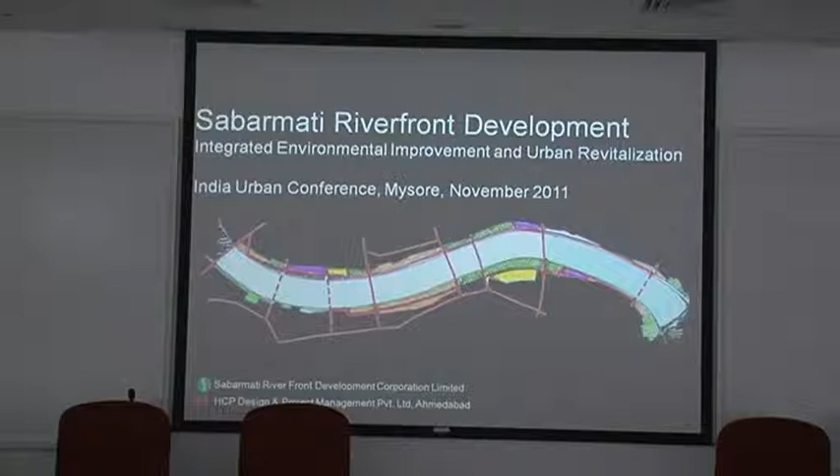Okay, I hope you can hear me. What I'm going to talk about is the Sabarmati Riverfront Development Project. So I think you've already seen this presentation. So I haven't actually. You haven't? Okay, well, then I'm very, very glad that you're going to be here.

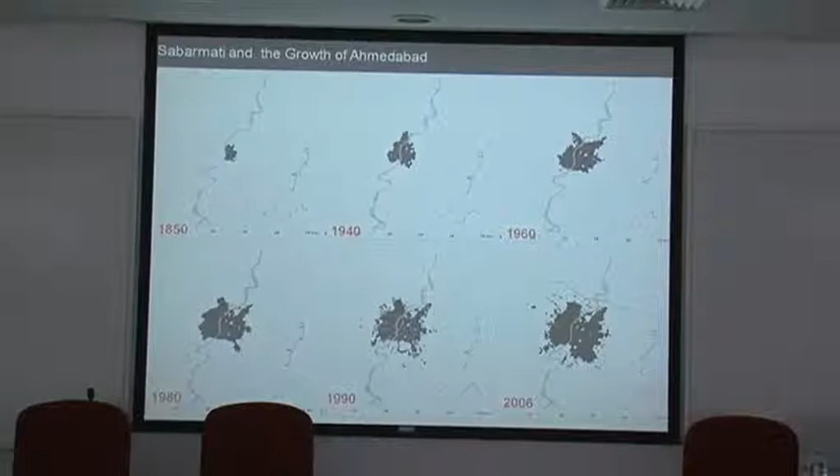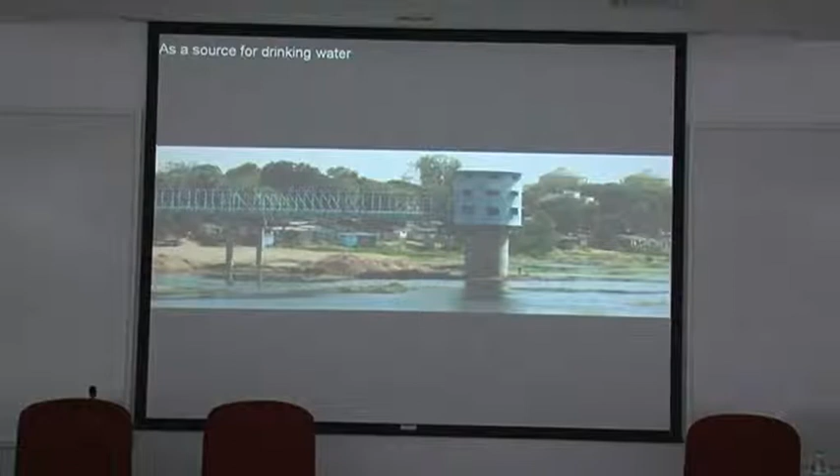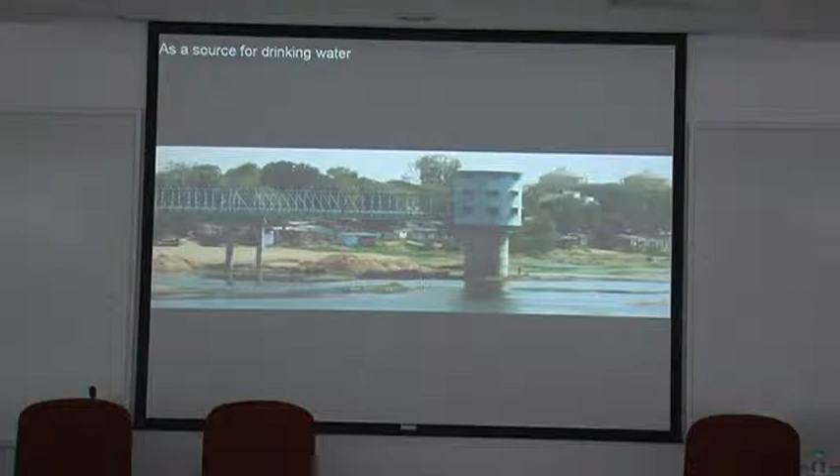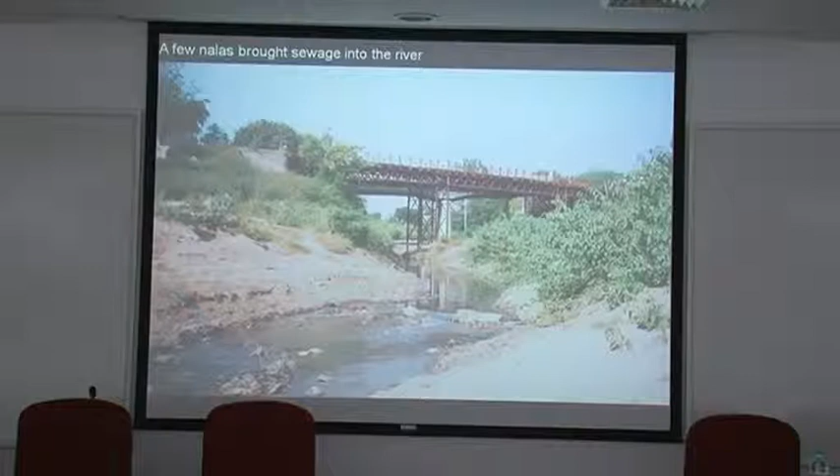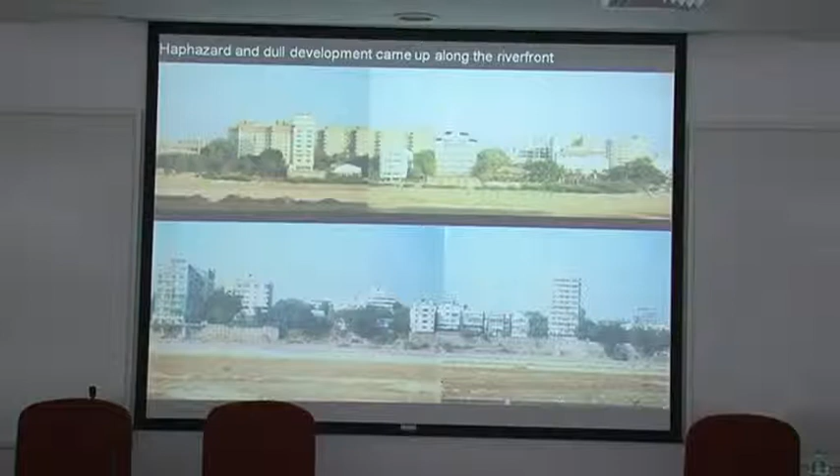Most importantly, if you look at the entire river, and this is when there's water during the monsoon, the entire edge of this river is private. There's not a single... if anybody wants to walk along the edge of the river, you would have to cross private properties. It's like a beach you have built right all the way up, and they're private properties.

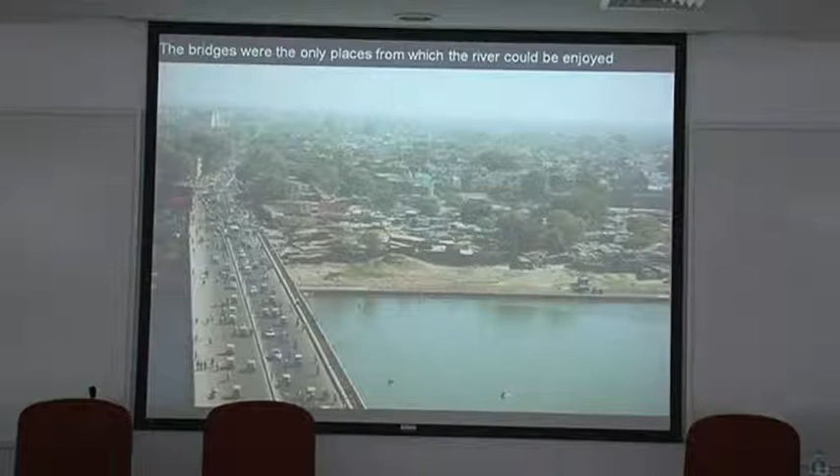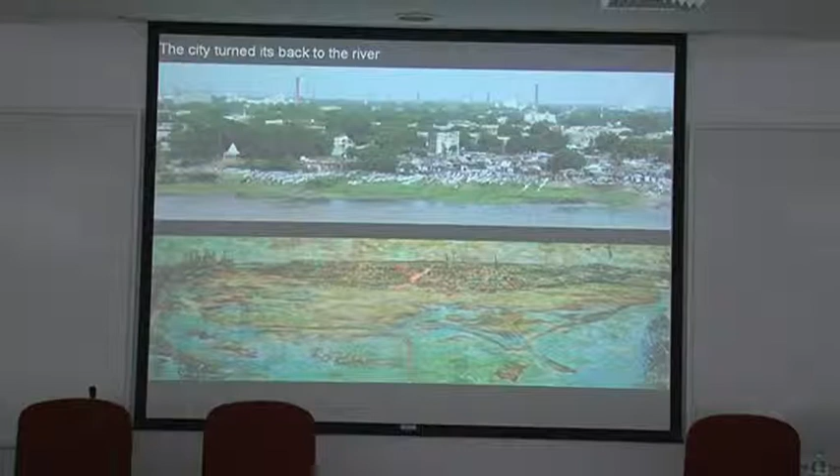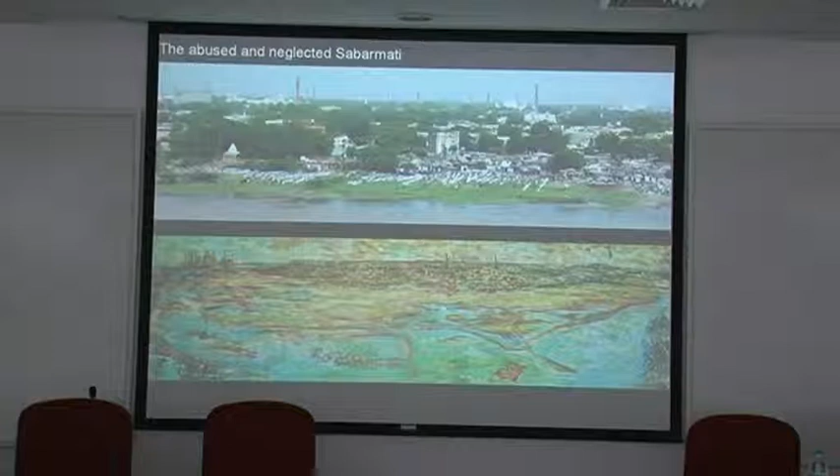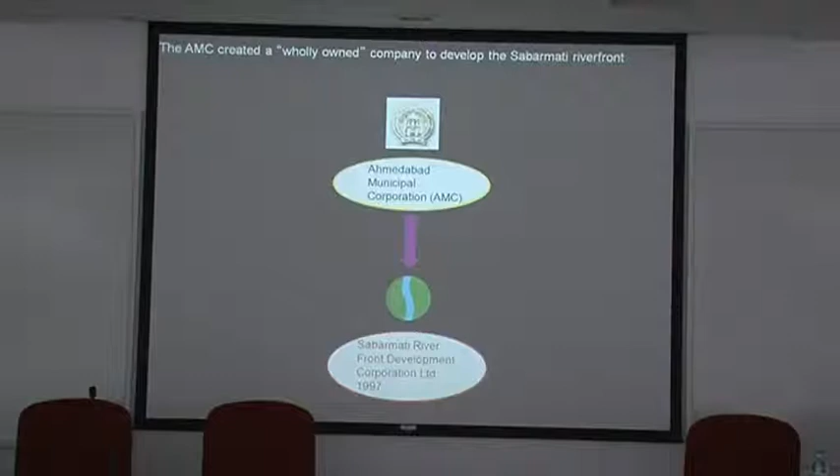The Ahmedabad Municipal Corporation became serious about doing something about the river in 1997 and set up a wholly owned company, a municipal corporation owned company registered under the Companies Act, to develop and make the riverfront. So it's a 100% public project I'm talking about. There's no private development in it.

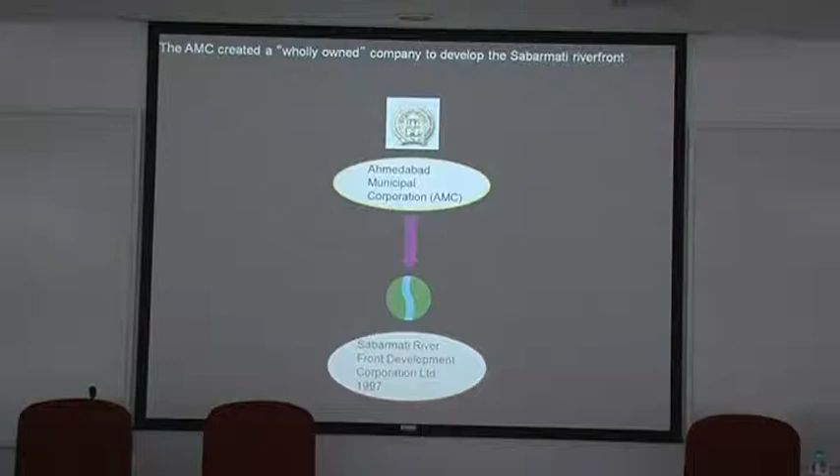At that time, in 1998, the first schematic proposal was drawn up after looking at all aspects of the project. So everything from physical features of the river to river hydraulics, land use, slums, implementation strategy, cost, project cost, etc. Everything was worked out at that time.

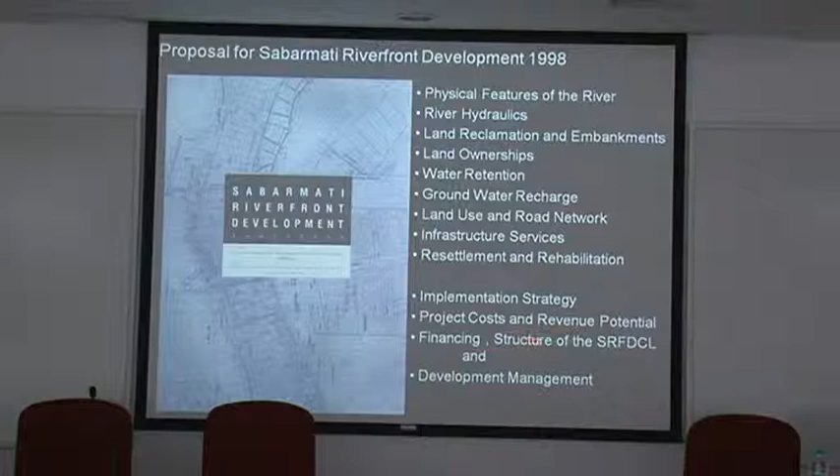The project that was devised at that time is a multi-dimensional environmental improvement, social upliftment, and urban rejuvenation project. It's not just one thing. It has many dimensions and many ambitions.

But before I explain them, let me first explain the context of the project. It's important to understand it.

Which means all the rainfall that falls in this area gushes past Ahmedabad. In the monsoon, you would get a lot of rainfall and a lot of floods. The city and all the towns along it would get affected.

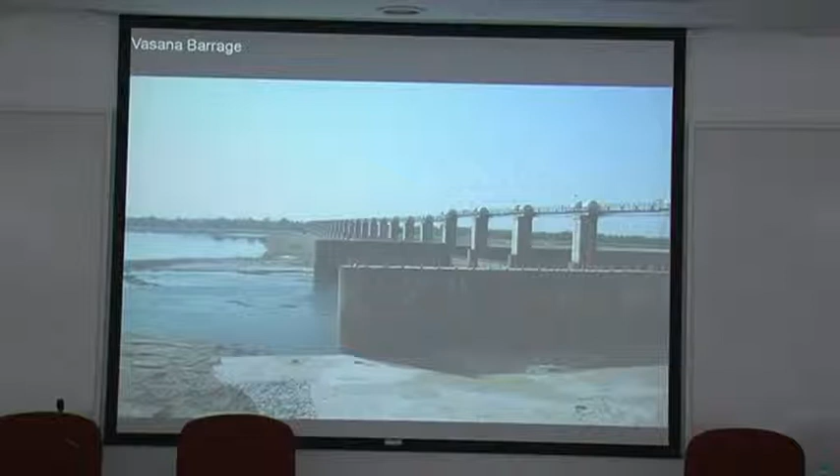So after the water was used up, the river was empty again. Here you can see that barrage, and this is the water that's held back. It's a shallow dam, you can see. When the water gets used up for irrigation, there's nothing left, and the river becomes dry again. So through summer it's dry, and through monsoon it has a little bit of water.

What became possible? Here you can see a nearer picture. This is Ahmedabad here, you can see the river going down like that. That's the Vasana barrage, that's the water held back by the barrage. This is the canal for irrigation. And you can see just upstream of Ahmedabad this Narmada canal passing by. They gave a little inlet so that you could actually replenish the water in this barrage and use it for irrigation.

So what this did was make it possible for Ahmedabad to have water in this much area for the entire year. Ahmedabad ended up having the possibility of having a linear lake. It's basically a linear lake held back by the dam. And you had this linear lake, a 12-kilometer long lake, right through the middle of the city.

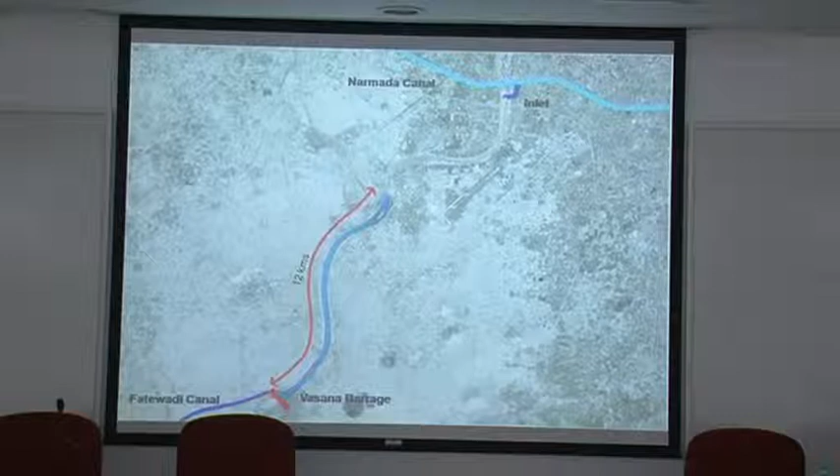Now this project, as I said, is ambitious. It has many different environmental, social upliftment, urban rejuvenation type of ambitions.

There's a whole series of them, let me go over them straight away. The first ambition of the project is to make the riverfront accessible to the public. This entire river edge is private, and the first ambition of the project is to socialize the edge of the bank of the river.

The simple way that was done was to build two parallel embankments that cut right across, and to reclaim the land, just in the same way that Marine Drive was built many years ago. And so you would get a sliver of land.

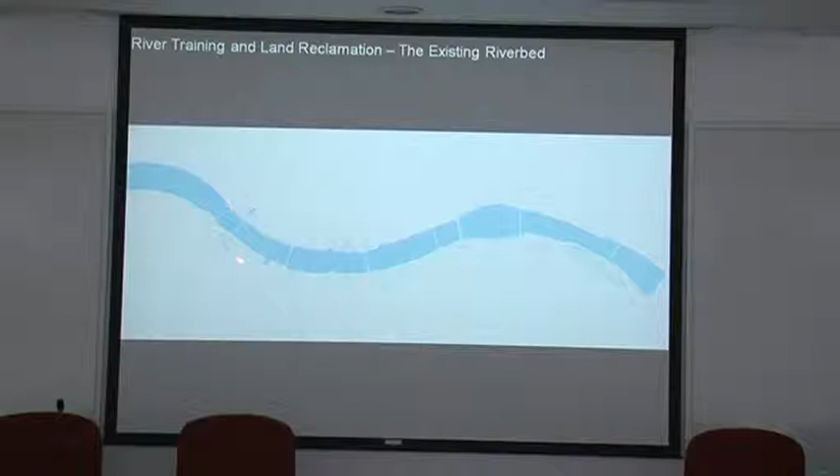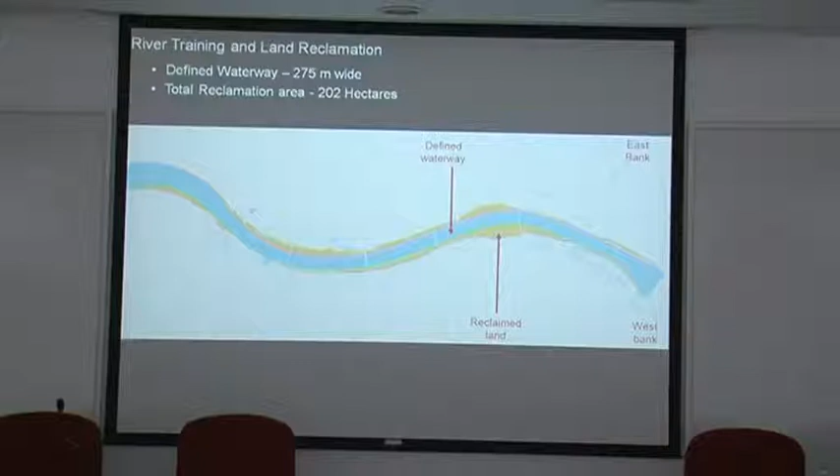Now, if you look at the section of the river where it's wide, it's quite wide, 679 meters, and the two embankments could be built 275 meters apart, and here you would get a lot of land. But where the river is narrow, you would get a very thin sliver of land.

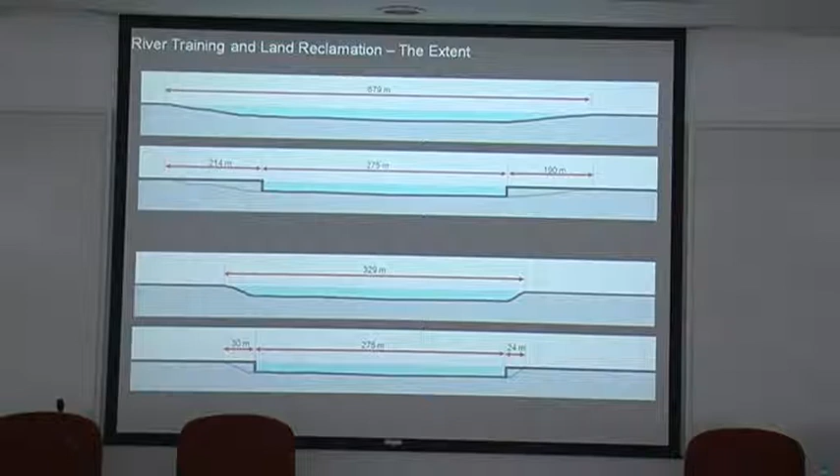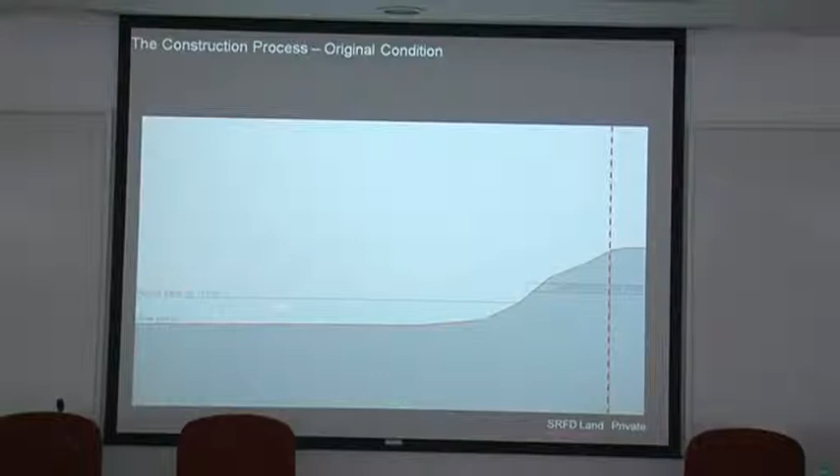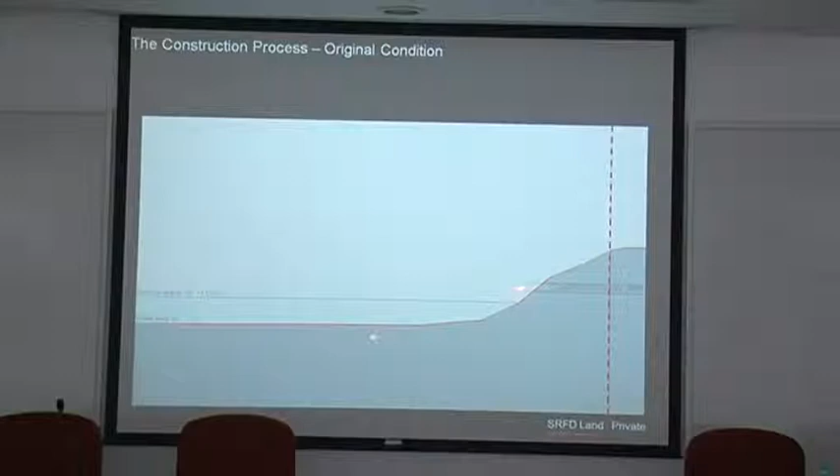Now, how was this done? This is the bank, one bank of the river you can see. This is the water that is held back by the barrage, the water level. When the flood comes, it comes to the top of this level, but this is what is held by the dam. And this is the stormwater drain that brings the sewage into the river. And this is the line that divides private property from public property.

So the first thing that was done was to take some soil from the river and build a construction platform like this with soil, and then put a concrete wall that goes into the bed of the river. You'll understand why this is done. And build a platform just about 2 or 3 feet on top of the water's edge here. And this is what is built here.

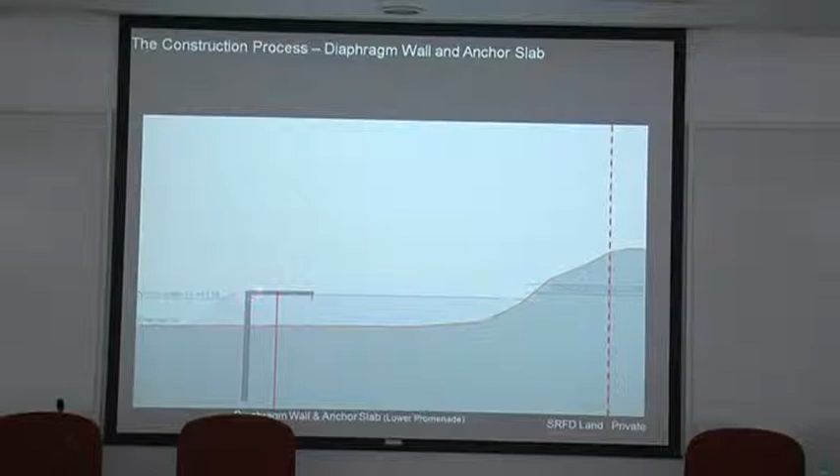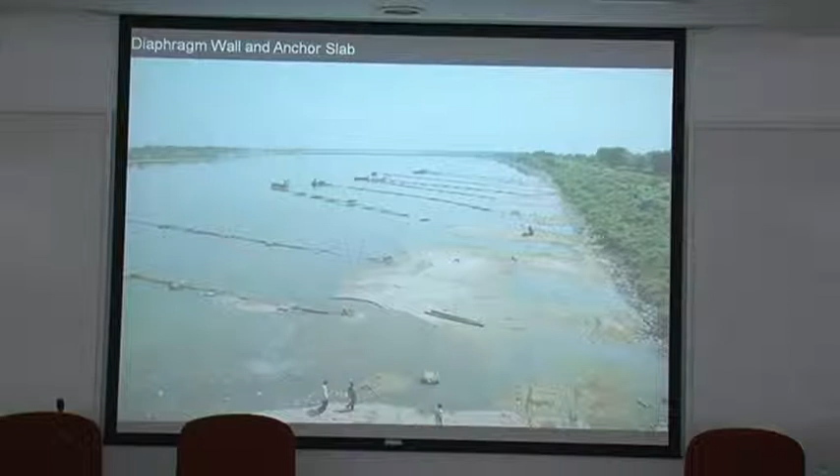It's not very difficult to do this, just a simple jugaad you have to do. You have boats here with pipes and pumps, and they bring water and sand here, and the water flows back, sand stays here. You've got your construction platform. And soon you have a platform like that, and then you have to dig a trench like that.

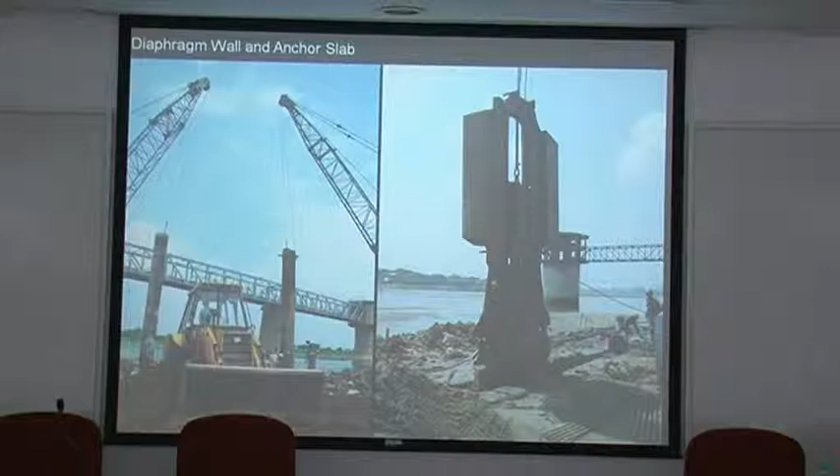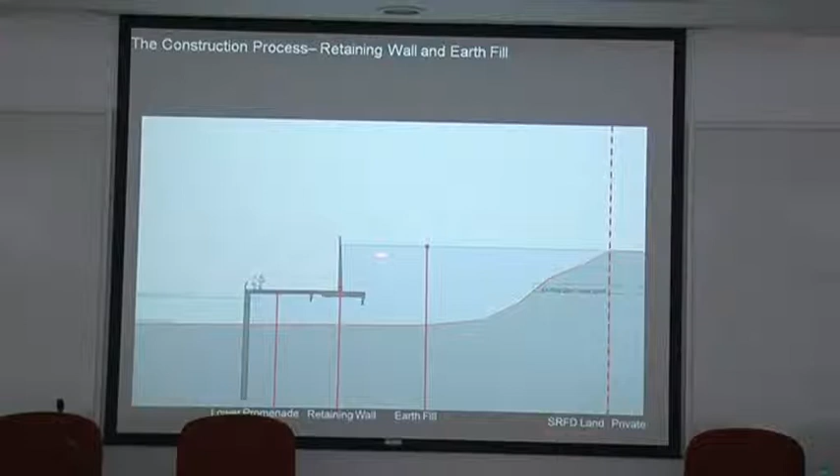Then the next job is to build this second wall here, it's a retaining wall, and then you fill earth here. So you bring this level right to the top of the existing bank here. And this is how the wall is built. You can see this is, once again, not very complicated work. This is easy.

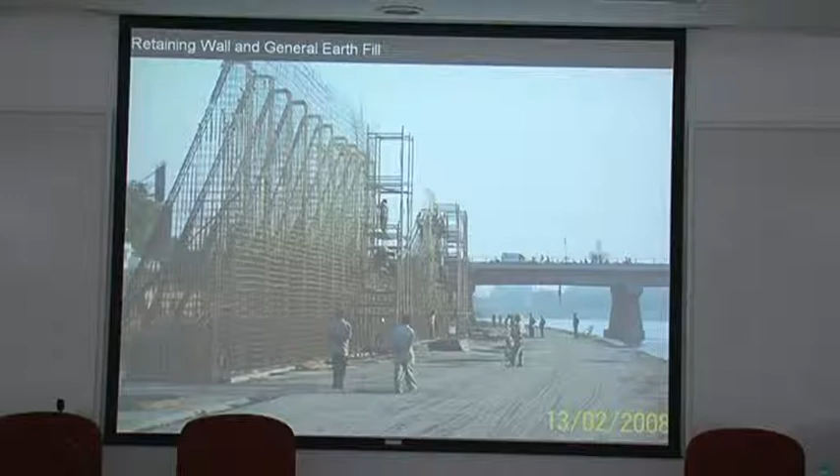Here's the wall being built, and these are steps coming down. And here's the earth fill being done at the back. There's a lot of earth fill that has to be done. You can get all of this earth from the river and put it here, because when the next monsoon comes and the flood comes, it'll bring more sand and soil down. So that's not a big problem.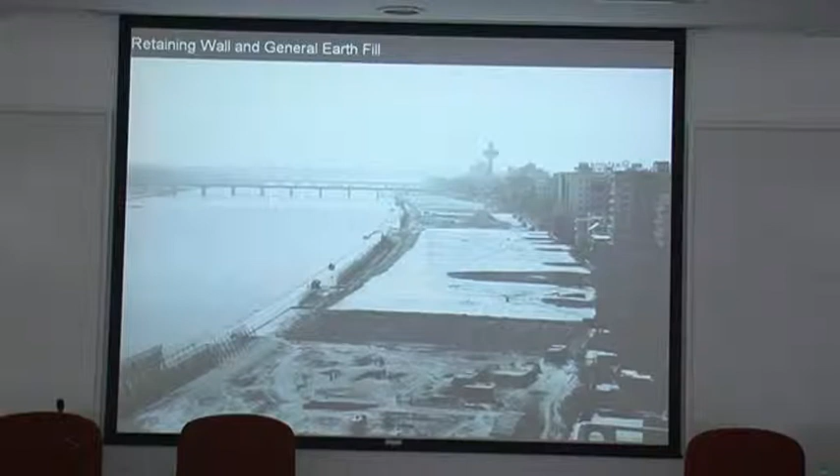Once that is done, here's some more pictures of it. And today, both of these sites have been completed, of course. So the entire length of the river is public. So that first ambition, so to say, of socializing or making the edge of the river public and accessible to the people has been achieved. Some of the earthwork and things are still pending, but pretty soon it will get done.

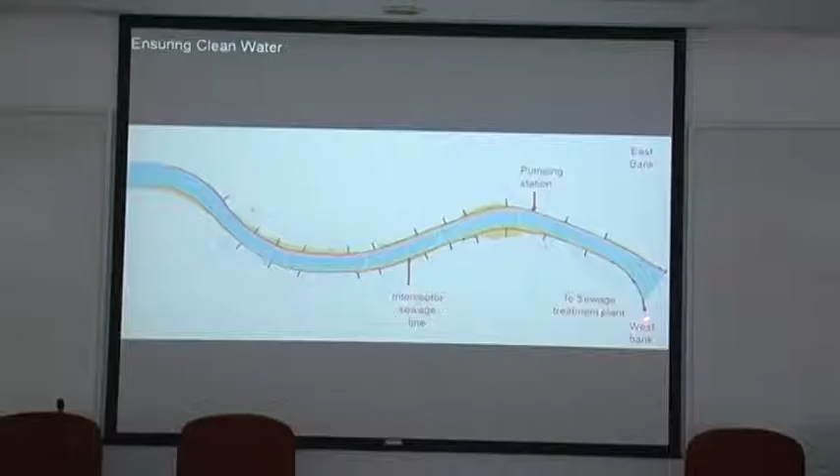The simple solution is, while this earth fill is being done, to put a big interceptor pipe that connects all the places from where sewage is coming into the river. You collect the sewage and take it to two treatment plants, conveniently located at the two ends on both banks, near the barrage. Their capacity is augmented, and then this pipe collects all the sewage and takes it right through.

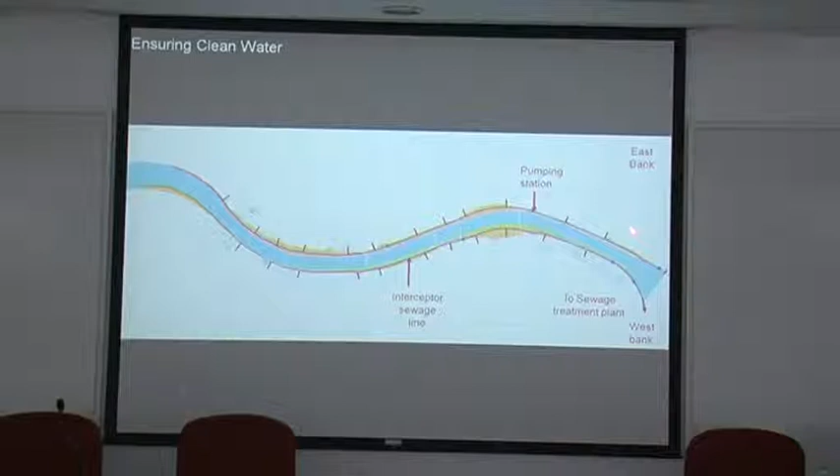So here's the pipe. You can see it runs through here. Just think of it for a minute - if this pipe was built without all of this other work, it would have to be very strong with very strong foundations. But the synergy from doing these things together means this pipe doesn't cost very much to build.

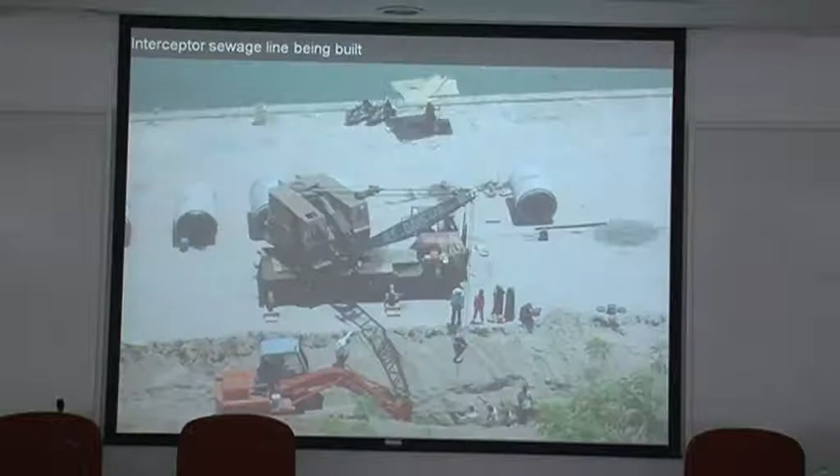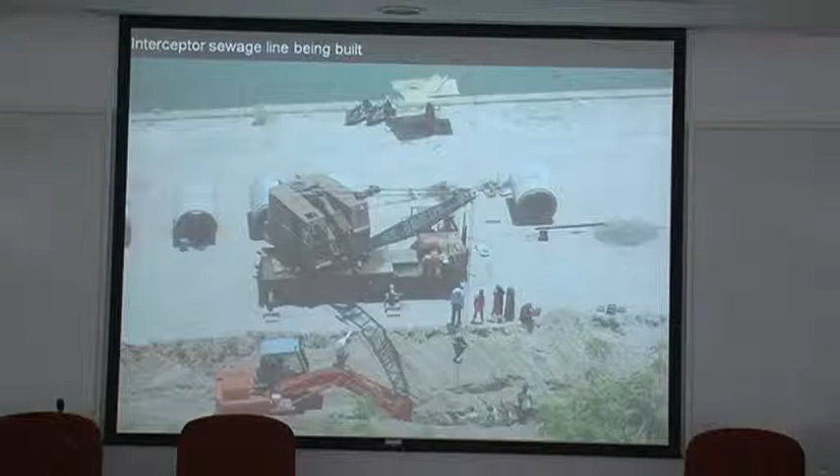You can see the existing stormwater drain being connected here, and the pipe being laid in the mud and soil. This is the pipe with the manholes, and these are the pumping stations.

I think in another month or so the pumping station work will be finished - this is an old slide. So we can say that within another month or so, the flow of sewage into the river is going to stop.

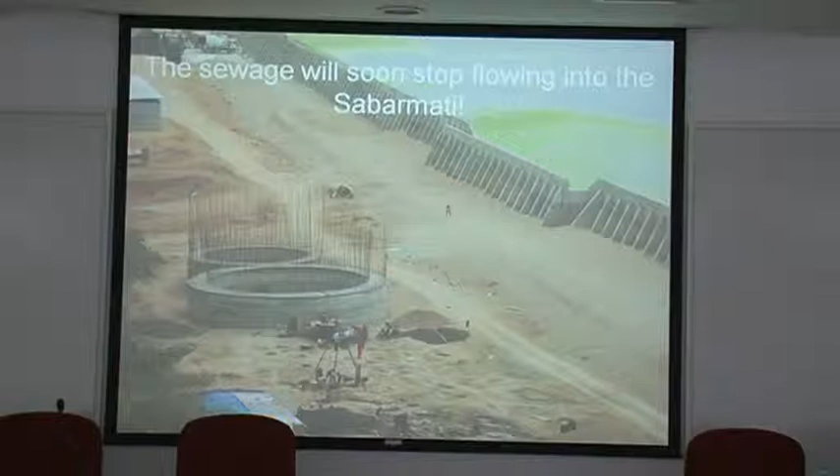The other ambition of the project is to provide housing for riverbed slum dwellers, because there's lots of people you're going to have to dislocate. So here you have the slums.

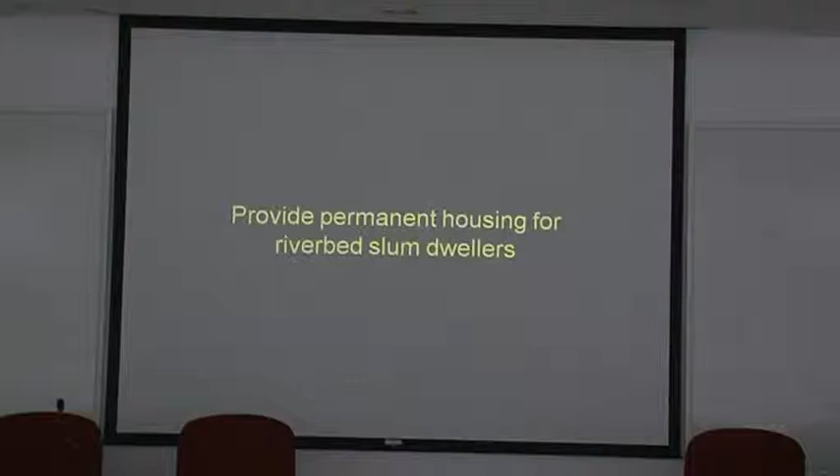Within the city, other municipal plots were found where housing could be built for the people in the slums. When the project started, these plots were not identified and not yet available. If you look at the old project report, we said one simple thing: we are reclaiming so much land, we will use 10% of it to build the housing.

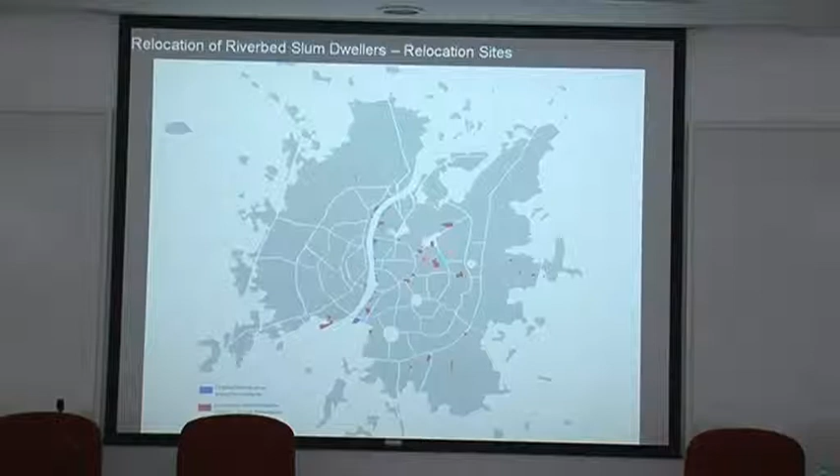But once the project got going, the municipal corporation said, why use riverfront land for housing? If it can be turned into parks and gardens, it's much better. So then all of this other land was found - these are all the relocation sites.

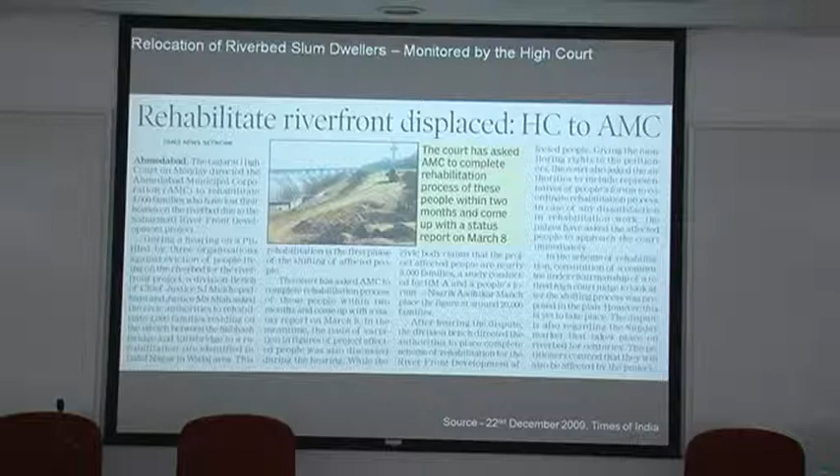The relocation is being monitored by the Gujarat High Court. The plan is submitted to the High Court, and the High Court monitors what is happening. Only when the houses are ready is the project allowed to move the people.

As of 17th December, you have 1,387 households done, with an average of 25 to 40 households being moved daily. At present, all the houses are ready, and people are going to move. Inevitably this process is a bit messy, but it's basically a voluntary process, and people are moving into housing of this sort. The project, of course, pays for the housing in one way or another.

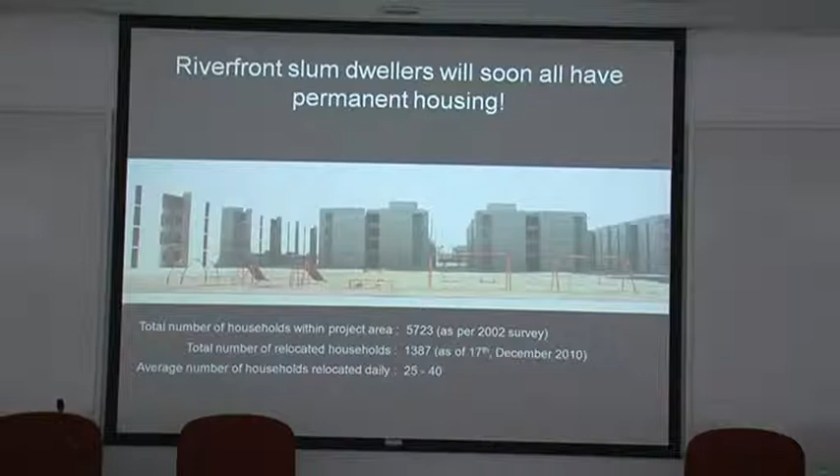Many people, including myself, don't like all of that concrete, but that concrete has a purpose in some sense.

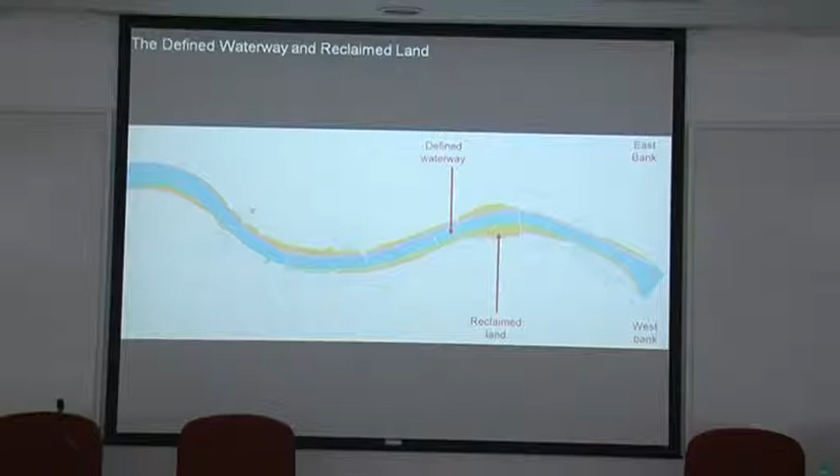Also remember, the principle of design was simple. Intuitively, it seems that if you narrow a river from this width to this width, the water level should rise—that's intuitive sense. But you can see what happens when you narrow a tube like that: the velocity of water increases. So far as the velocity increase is the same as the cross-section area decrease, the flood carrying capacity of the river remains constant. If your velocity increases by 5% and your cross section decreases by 5%, the flood carrying capacity stays exactly the same. I'm simplifying a bit, but not too much.

That's the principle on which we decided how much to narrow—we narrow just enough so that the flood carrying capacity remains exactly what it was in the natural condition. That's something to keep in mind.

This is not just some computer simulation. This is a release of water in the river during 2006 when a lot of measurements were taken and the calibration of the computer model was checked out, by independent agencies including IIT Roorkee, and we found that the model holds. So it's not some imaginary stuff we're talking about—even when you reduce the cross section, we find that it's exactly right.

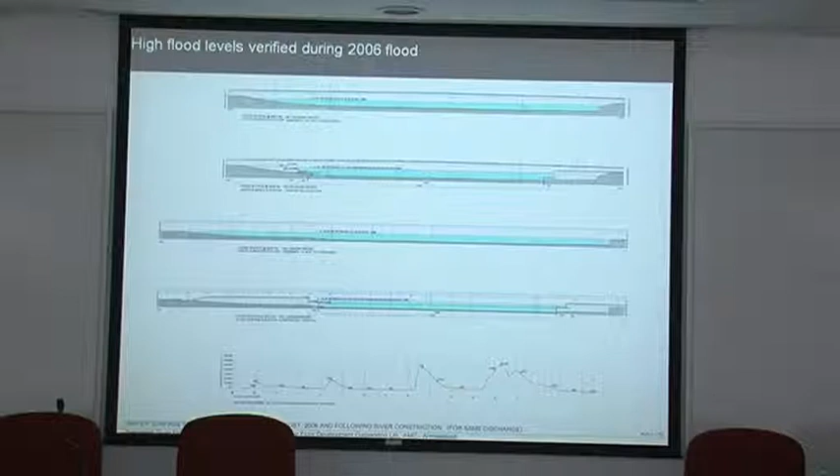And the risk of flooding is significantly reduced in low-lying neighborhoods on account of that. Now the idea is to use all this land to create many parks, promenades and gardens to enjoy the water—that's really the purpose. You want to create public space here.

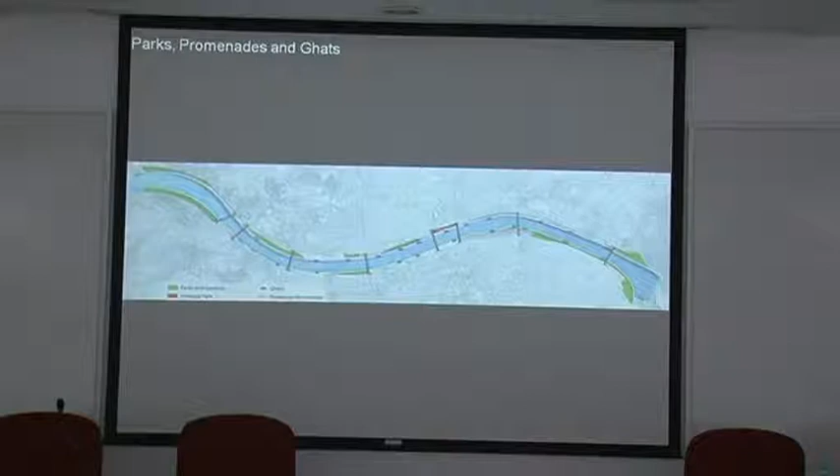So all this land can have beautiful parks and gardens if you want to. The idea is that all of these green spots are land reserved for gardens, and there's a promenade that runs along the length of the river, also at the lower level, near the water.

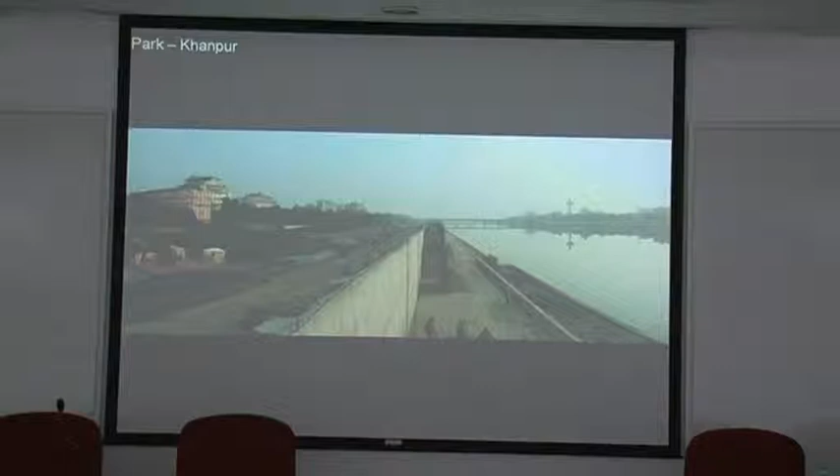Here you can see an actual photograph—you can see the revolving restaurant here. This is that lower promenade, which is entirely pedestrian. This presently is still not complete work here; you can see there's a slum here, and there's a Ganda Nala with sewage going through. But here's a visualization of what this same place would be like after it's done.

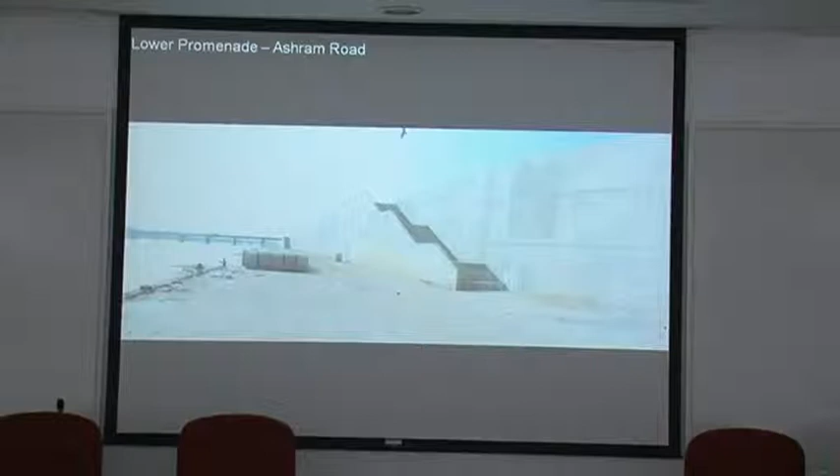Of course, this level can get submerged during floods, so there's no other activity here except pedestrian movement and walks. Here you can see where this walkway comes down. Someday these trees will have grown—they're already planted—and you'll have a marathon here in Ahmedabad. It's just an imagination for now.

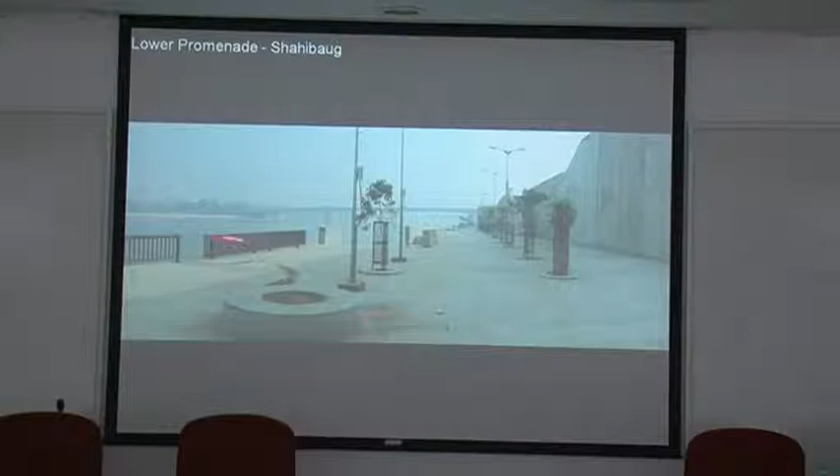Here you can see the place where a sample was prepared—this is the lower walkway and the trees here. You can imagine a Sunday morning sometime in the future. In fact, this place is going to be thrown open to the public on 27th December.

The lighting is being finished, and the trees have started growing—a little taller than in the earlier picture, but it'll get there. Eventually these are all neem trees we're growing, so they'll be big, and this becomes, at the water's edge, a place where you can walk and promenade.

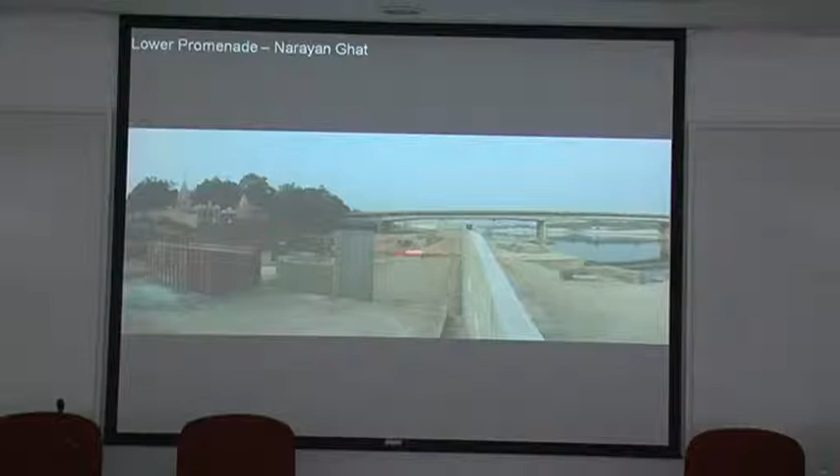Here's an existing temple, and here's a visualization of Ganesh Visarjan, the festival where people come with their Ganesh idols and take them down. This place has also started getting used now.

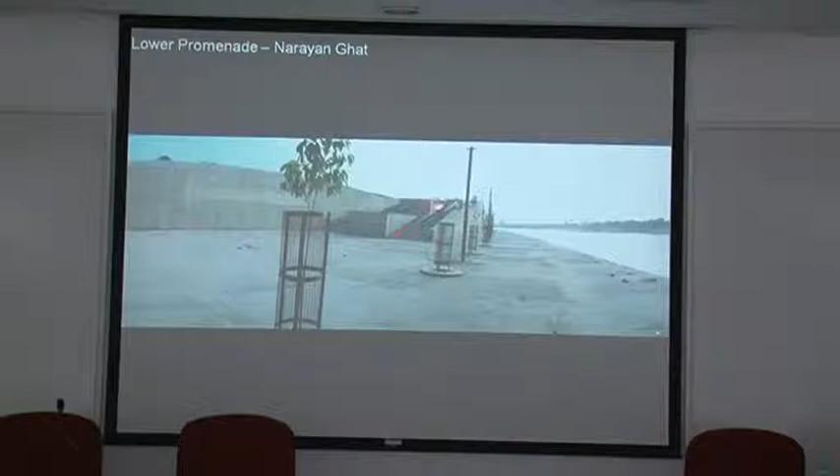Now, the project will add almost 1 million square meters of parks, promenades and plazas to Ahmedabad in the center of town. This will make it possible to go for a 10-kilometer cycle ride or a walk without any traffic around.

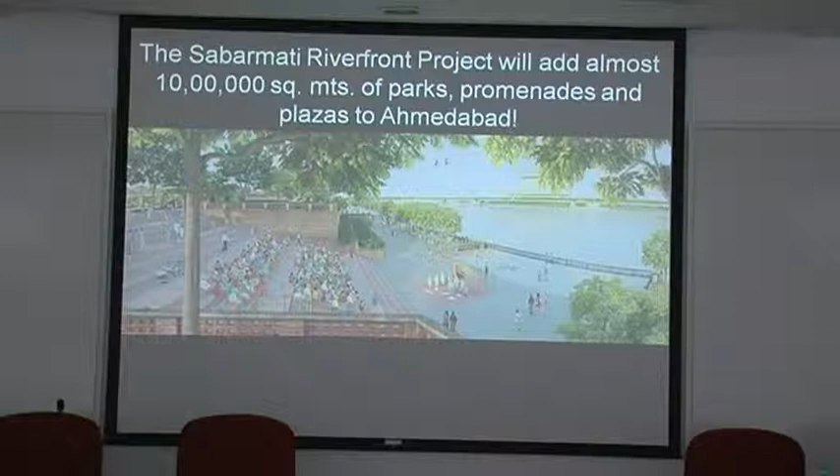People started using it already. You can see here the sample stretch I talked about. About 14 months ago, during last year's Ganesh Visarjan, people had come with their Ganesh idol and suddenly found this clean place, because it was a sample we had done and kept clean, and they broke out into a dance. Our cities are so starved of places where people can act.

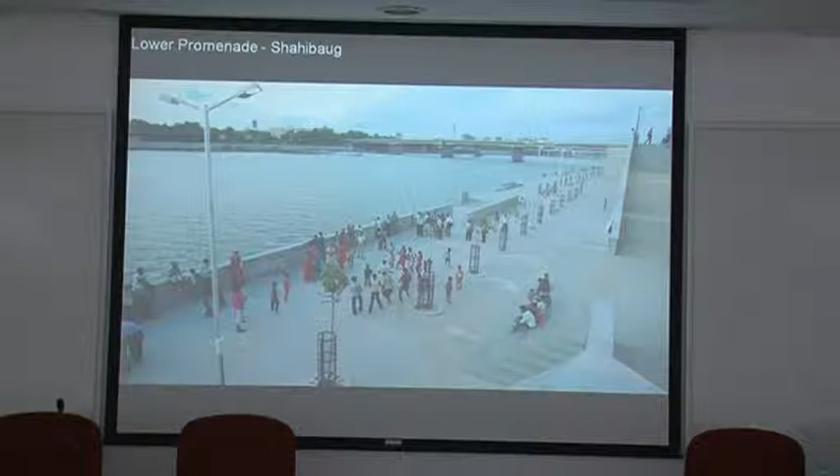Here you are—just impromptu, they took out their slippers and started dancing. We were thrilled, really.

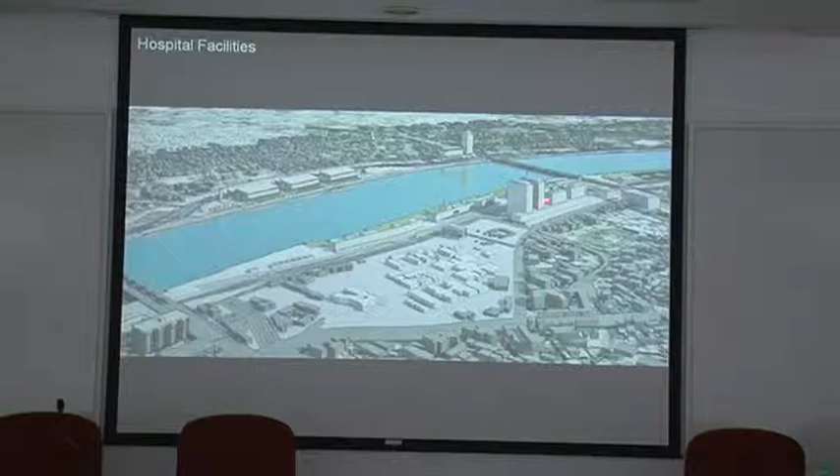Here, for example, is the existing hospital facility of the city—very low density development in the center of town. The idea is that this land from the riverfront can be used to build this hospital in a modern state, and this land can be freed up to do something else. That's a possibility.

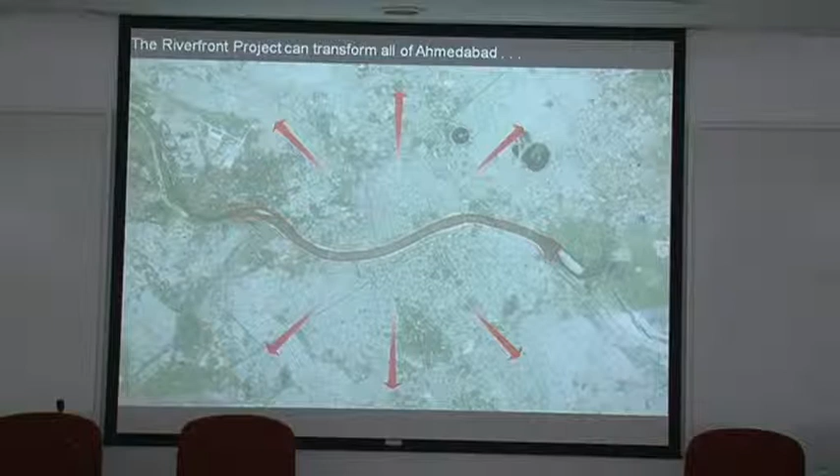Also the idea is to revitalize riverfront neighborhoods. Next, please. This project runs through the middle of the city. Next, please. And its idea is that this project can be used to transform the areas along the river. Next, please. And precincts have been identified, and precinct plans are being prepared for all the neighborhoods along, for essentially what is their character, what can they be in the future.

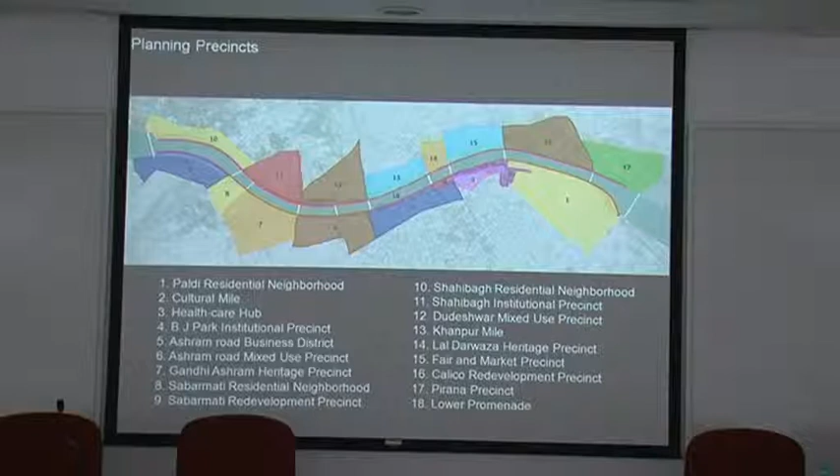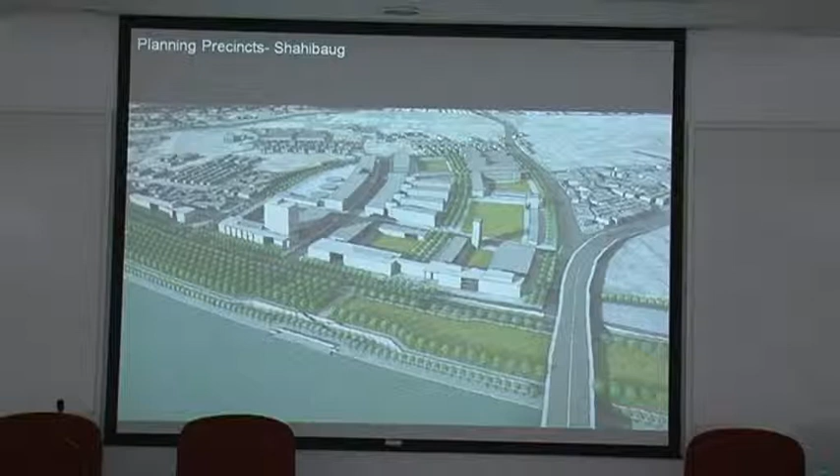Other ambition of the project is to generate resources to pay for all of these. Who's going to pay for all of these works? Next, please. So the idea was from the beginning that some of the land that is reclaimed would be sold. And from the sale of land, you would get resources to pay for all of these activities, because not a pie of government funding is to be used in doing any of these works, despite the fact that it's a 100% government project. However, remember that there's not the aim of making cash profits. Next, please.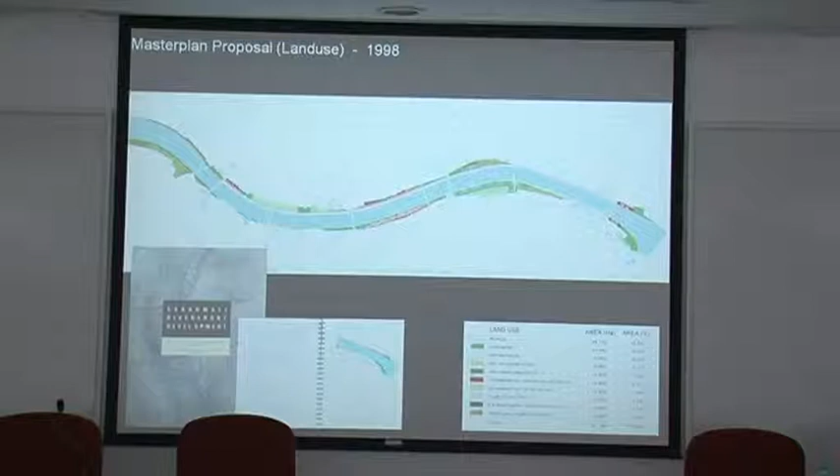Originally the project costs were worked out, and only that much amount of land was to be sold that would be necessary to pay for the project, which happened to be at that time 20% of the land that is reclaimed. However, when the project became real, more and more people see the possibility and want it, the prices for that land go up. So it's possible to sell less land. So presently, the amount of land for sale has been capped at 14.5%. So actually, it has gone down so that the rest of the land can remain for the city.

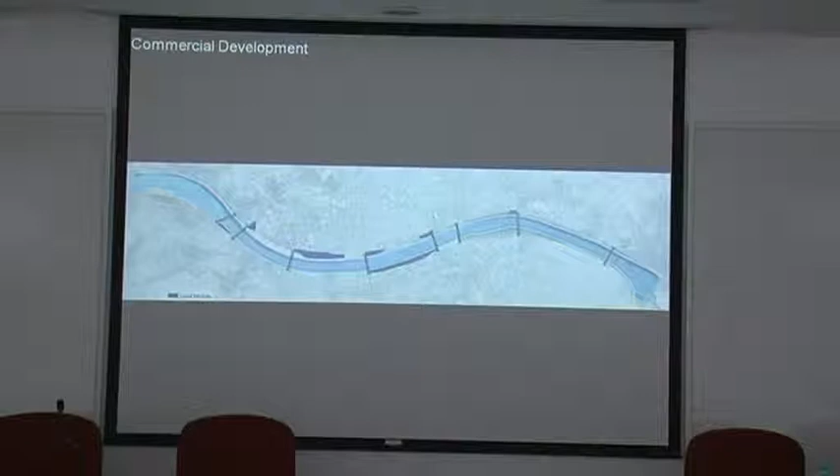Next, please. And the idea is these blue spots are the areas where it will be sold. Nowhere will the edge of the river be sold. That is very clear. Next, please. And it's these locations along bridge ends which are very, very pricey, and you can sell those pieces of land. Next, please. Or you take a look at these two ends. Next, please. Or here along this bridge, if you sell that much portion of land, there's some municipal land at the back, so if you sell it together, they can pay for all of that park and garden that's already being built there. Next, please. And presently, as I said, 14.5% is the land for sale.